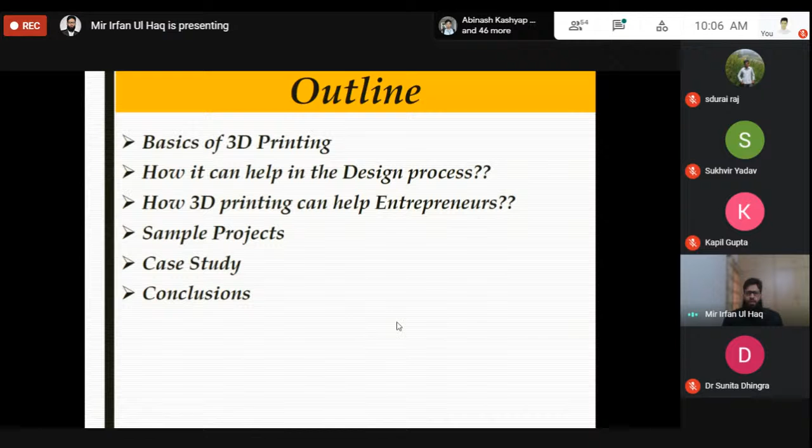So the outline: I think this is day 3 of this. The basics of 3D printing, just to make a background of what we will be discussing, how 3D printing can help in the design process. Post to that, we will see how 3D printing can help in the design process and how 3D printing can aid in entrepreneurship. I'll be discussing with you some sample projects which we have carried out here at SMVDU. Some case studies will also be taken up.

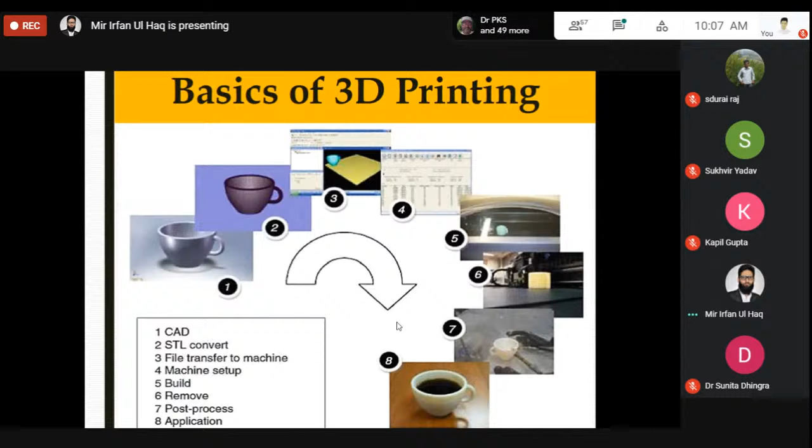So by now we know that 3D printing is a type of manufacturing in which we build the part layer by layer, and directly we are able to develop a physical part from a CAD file or a digital file, and the part is being built layer by layer, and there is a little bit of post processing involved. So I'll be discussing some details in future slides.

Part quantity, suppose you can have a coffee, or you can go home, and at the end of the day you will have the part in your hand. So it is economical, and we will show you some slides on how it is cost effective.

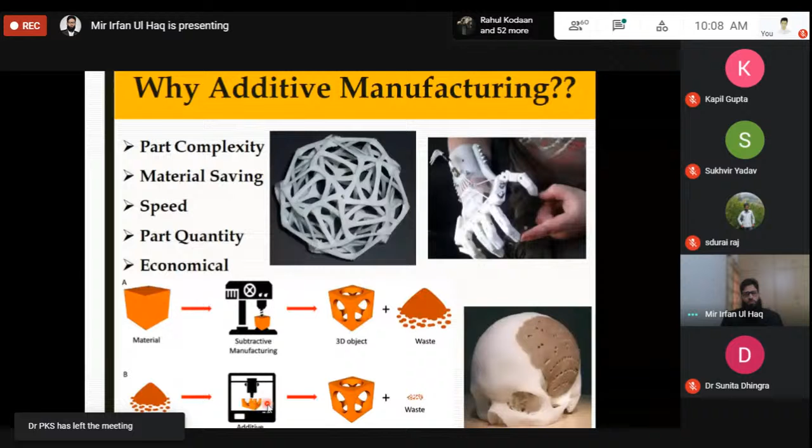And contrary to subtractive manufacturing, in which we start from a material like this, and then we remove the material from the part, and we reach the object like this. So there is a lot of wastage involved. Whereas in the case of additive manufacturing, we use the material in different forms, maybe in powder form or liquid form, and the wastage is very less.

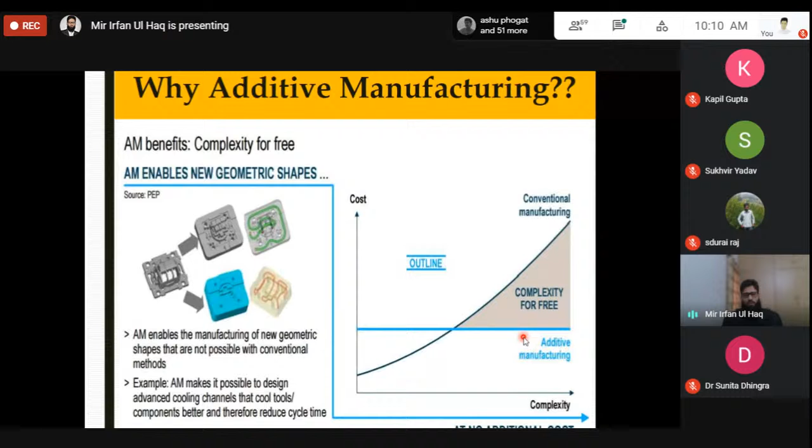So that is how in designing you will see that, suppose you are interested in making very intricate shapes, or there are some complex internal geometries which are very difficult to produce by conventional manufacturing processes. So this technology of 3D printing has the capability to handle complexity for free.

So the types of 3D printing, you must be aware of the types of machines: one is powder based, where the base material is powder, and liquid based, in which the base material is a liquid, and solid based is the third category.

In the powder based, which is basically used in case of metallic printers, we call it selective laser sintering. In this powder bed, a layer of powder is put on the table, and a laser comes and sinters geometry as per the data of one of the layers.

What 3D printing actually does is that, suppose I am interested in printing this cup. Suppose I make the CAD file of this cup, and then STL format actually saves this CAD data in the form of layers. Suppose the first layer of this cup would be just a circular one, and if you reach the fifth or sixth layer, there will be some part of this handle.

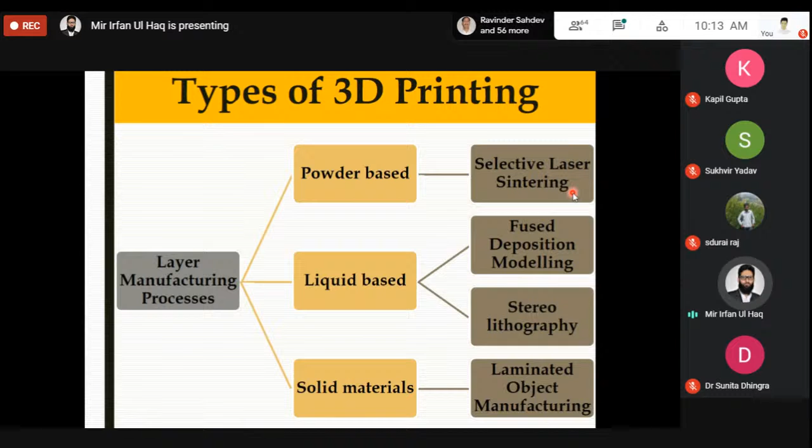If you have seen, many of the labs in India now have this fused deposition modeling, and it's very economical also to buy, in which basically we have an ABS spool. Typically this technology is suited for polymeric materials, in which the material is supplied in the form of a filament.

Constantly in this, the driving motor feeds the extruder. The extruder is at a slightly higher temperature, so the material, which till now was in a solid state, gets converted into a semi-solid, semi-liquid state, and in the semi-liquid state, as per the data of a particular layer, it drops the first layer on the base plate.

The base plate is also at a higher temperature. So layer by layer, the part starts building up, and by cooling of the semi-liquid polymeric material, the part solidifies and starts building up. I have an AV on this. Since this course is a virtual one, I have made a video of the 3D printer.

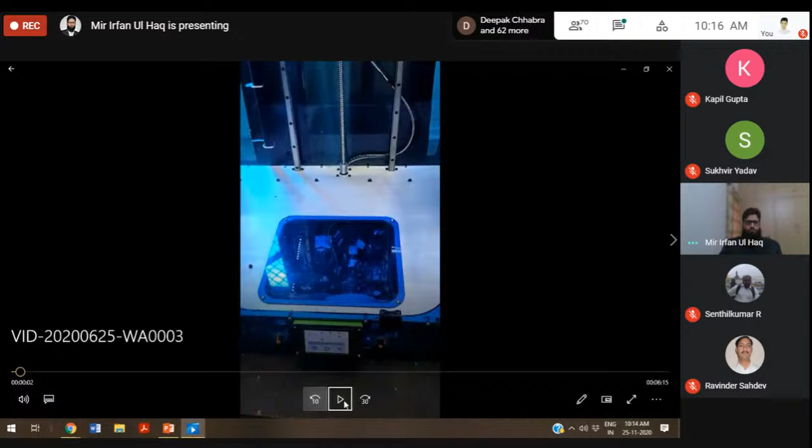Is this video visible? No, sir, not at all. First of all, you have to stop this presentation, then start the video itself. 1 minute. Now it is visible. Yes, sir. Now it is visible.

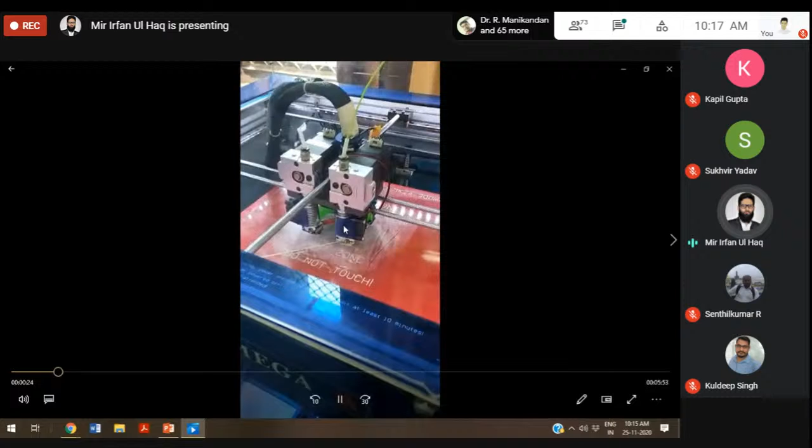Thank you. So this is a conventional fused deposition modelling 3D printer, in which we have two extruders, and the material is being supplied through this nozzle here. It is converted by heating into a semi-solid state, and then deposited on the base plate. The red one is the base plate, which is at a slightly higher temperature, and you can see the first layer being printed on the plate.

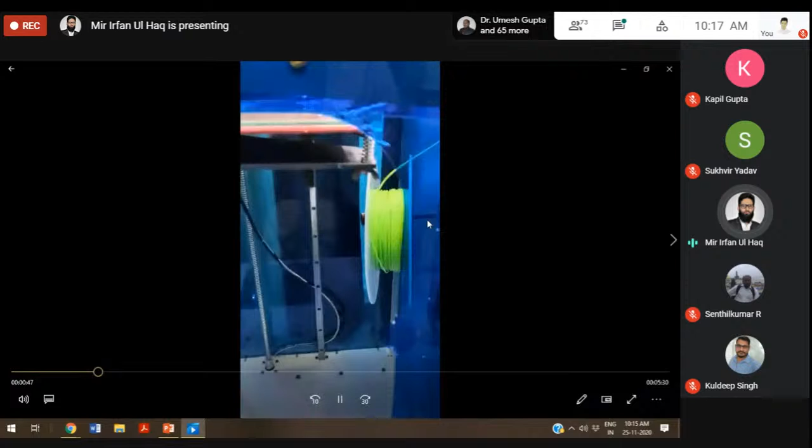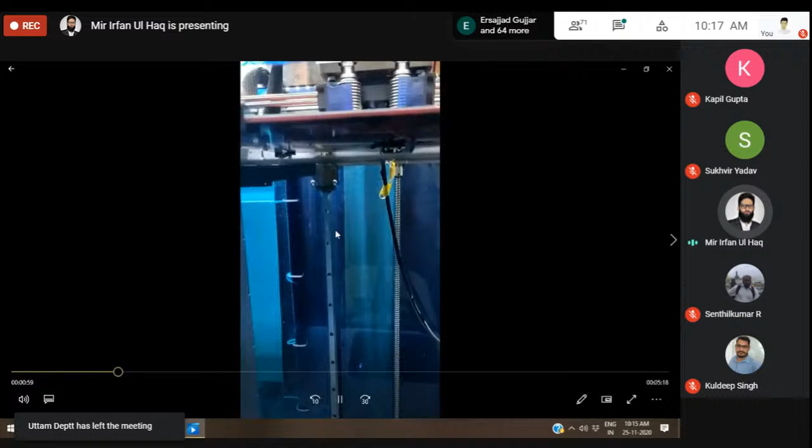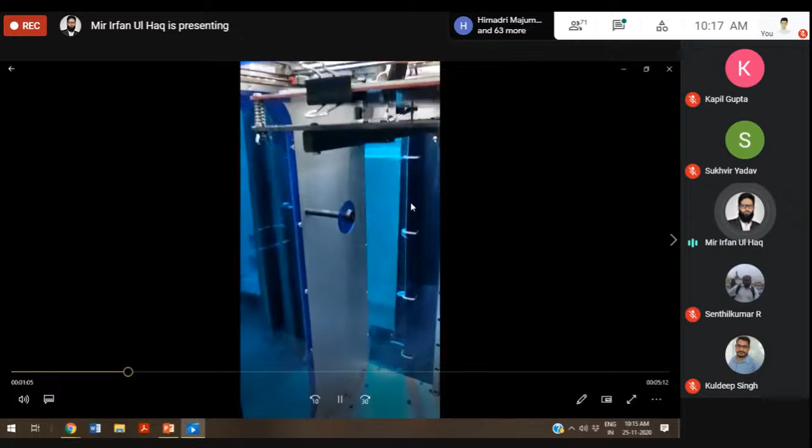So this is the spool through which the material is being supplied. This is a polymeric material, probably polylactic acid, in the form of a filament. And you can see how this base plate can move in the Z direction, and the extruder has the capability to move in X and Y directions, so it will move in accordance to the data saved in the STL format for a particular layer.

So we have a provision in which we can change different parameters in this machine. For example, we can vary the bed temperature, because the temperature of the bed will affect the bonding of consecutive layers one over another, which will ultimately have an effect on the mechanical strength of the developed part.

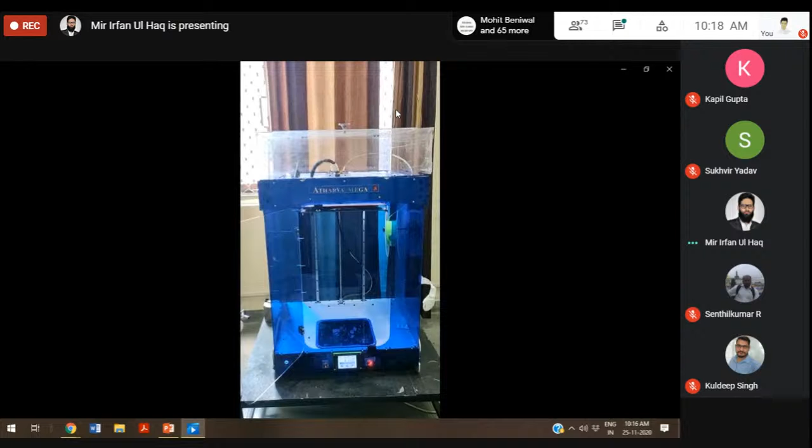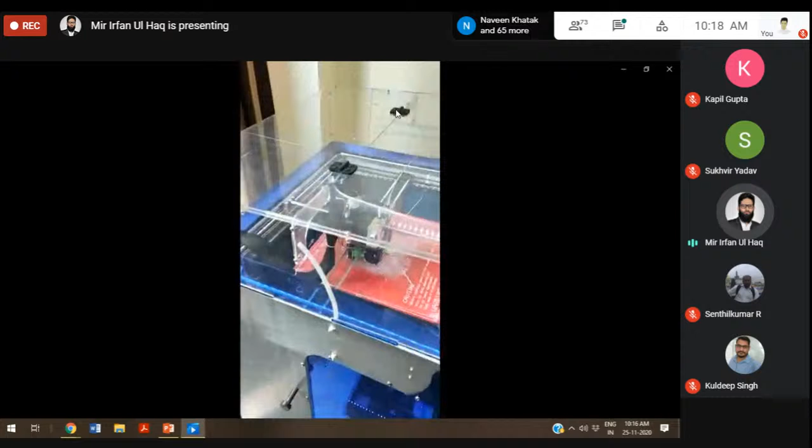We can change the layer thickness, we can change the infill pattern. I will show you those images, how we can change what I'm talking about. And we can change the infill density also. So depending upon our application and the material we are using, we can select the parameters, and I will show you in the consecutive slides what we have done on this simple machine.

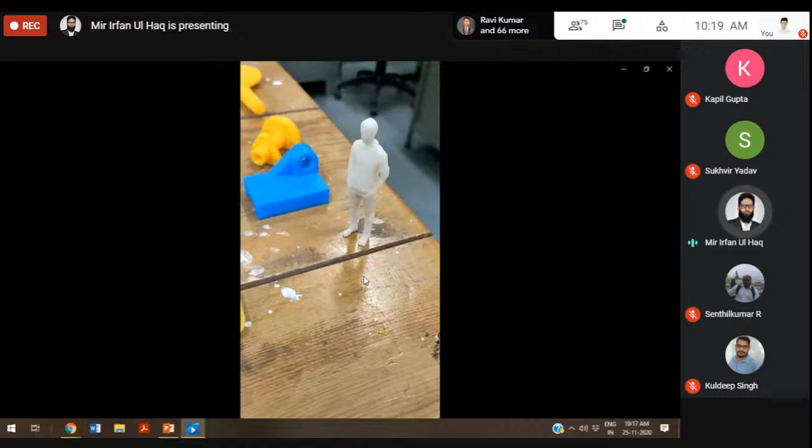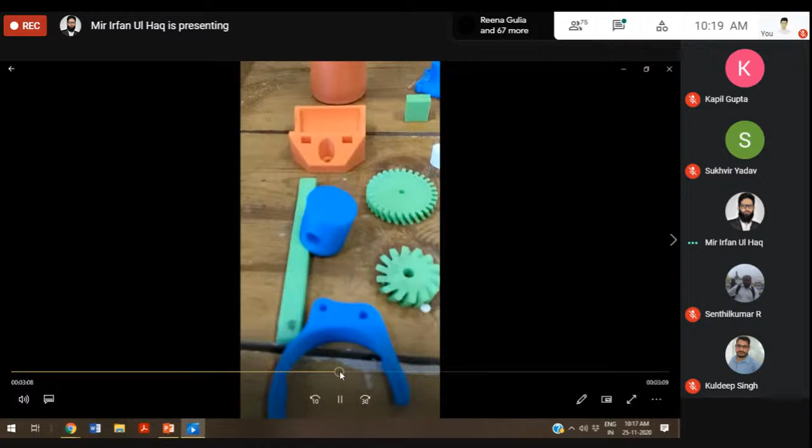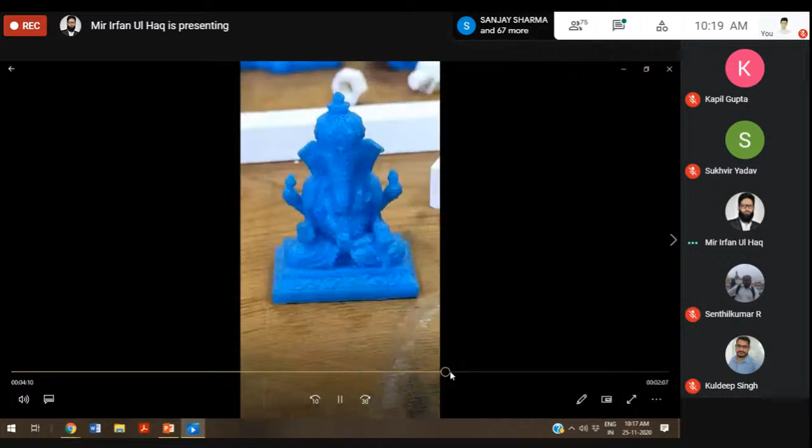So this is used. You can see some of the small parts, how a 3D printer works, which we have developed in our labs and our students have printed. So the nut and bolt, which has been printed by the 3D printer. See, the part has started building up. This is the material.

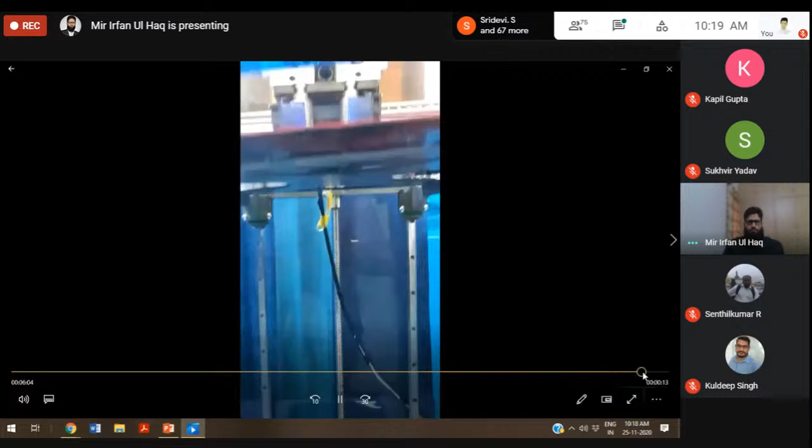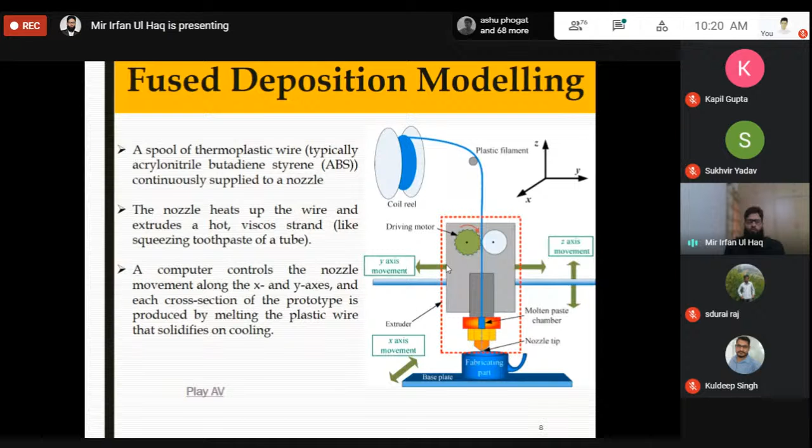So this was about fused deposition modeling, and I will talk about fused deposition modeling because it's a cheap technology and it is viable for, I would say, small entrepreneurs, small designers who are working at a very small level. So the compatible materials with 3D printing in general, we can 3D print poly

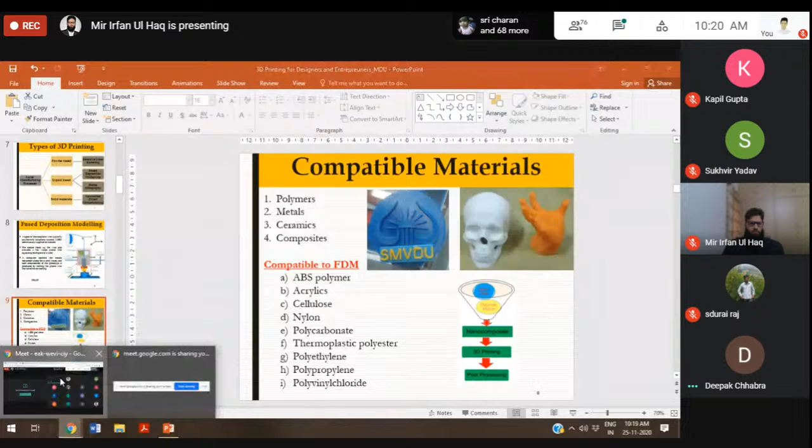Sir, please unmute yourself. Irfan sir, yeah. Yeah. So yeah, no. What was the previous slide? I was audible. Can anybody tell me? When I was talking during the video, you understood that? Okay. Yes, sir.

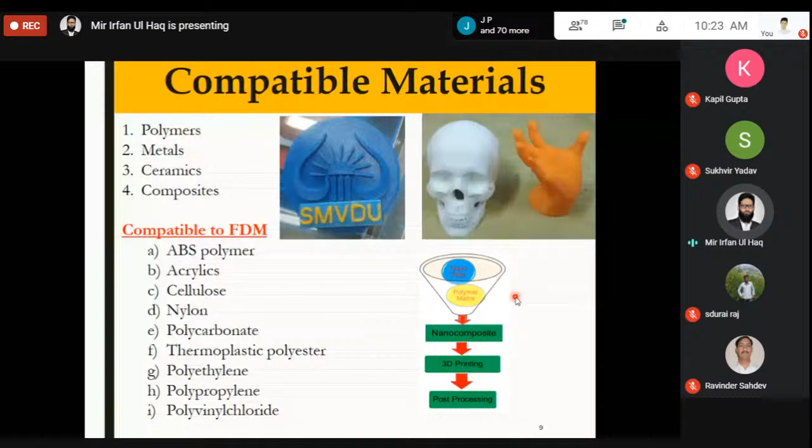The area of 3D printing, which is a new and disruptive one, and the area of nano or nanotechnology. So if you are able to augment both the technologies and both the fields, and in design also, this is a field where future research can be done. So think about that, but I will briefly touch upon this.

You can change the bed temperature in this machine, the model, the nozzle dia can be changed at different temperature. You can change the nozzle, which will give a different result altogether, different mechanical strength. What is important is how you build the part. Suppose we have this cup. So I'll start building flat, and second orientation could be like this.

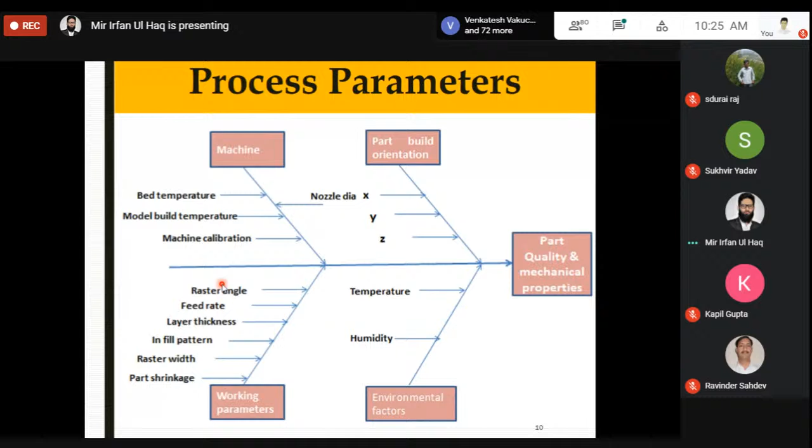Representation of how layer thickness is an important parameter. See, we are choosing the layer thickness. It's important because number one, I want the part geometry to be captured perfectly. But that would actually increase the time to print the part. And if I print thicker layers, that may have an effect on capturing the geometry and the overall strength of the part.

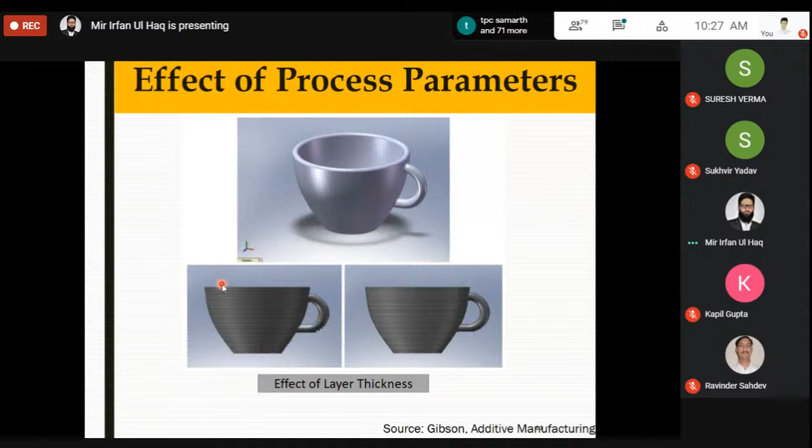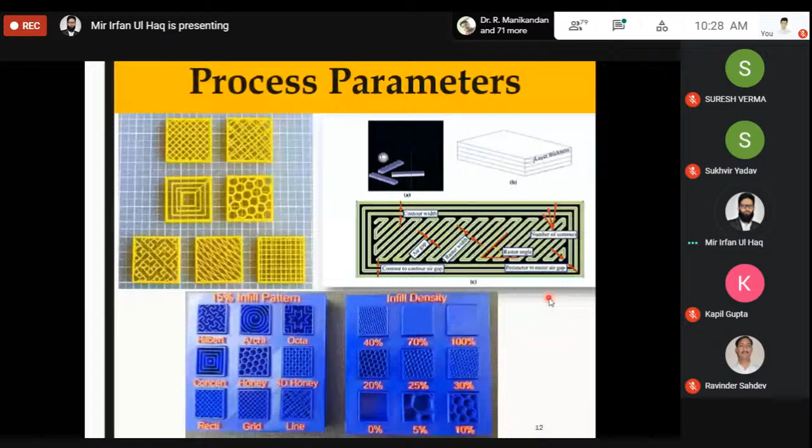So if you change these, what effect it will have on the mechanical strength and the geometry. So one drawback, or I would say one issue with fused deposition printing: it prints layer by layer, but there is a subsequent gradient, what we call thermal contraction, and that thermal contraction leads to bending.

Suppose if I print some part in winter, warping may damage the part or the product, or there will be some portions damaged. So that is an important consideration.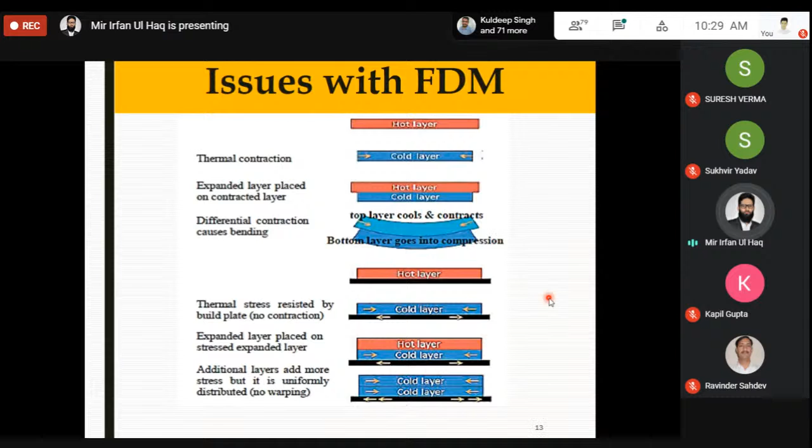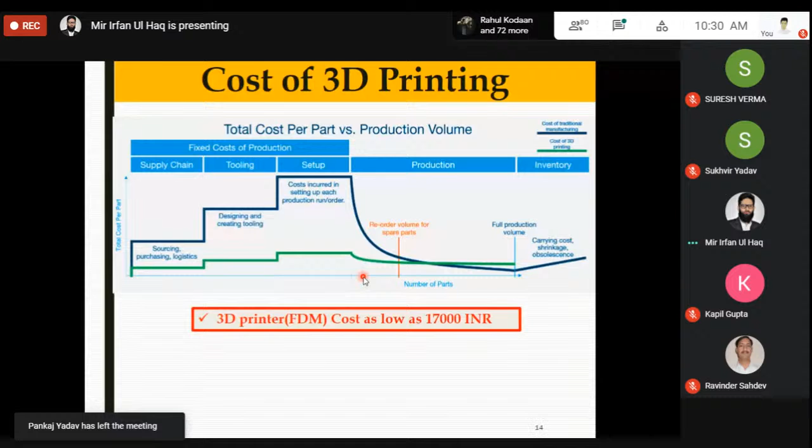In this slide, there are different 3D printing costs. In conventional processes, tooling costs and setup costs are high. If you see, in case of 3D printing, costs are much lower due to less involvement of tooling, less material wastage, and less human intervention, as in COVID. So if some technology is there which is able to run our industry or our factory, you will be amazed. So we are able to meet the deadlines.